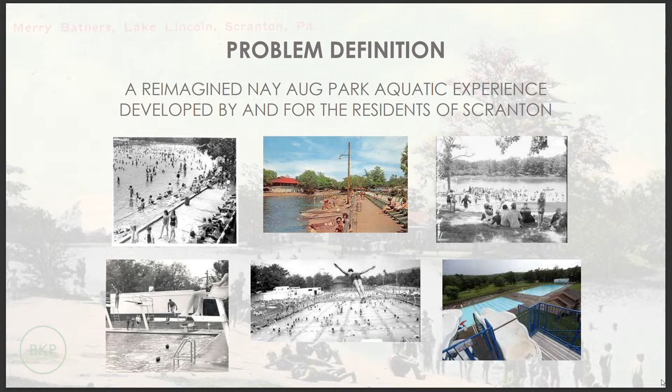As Eileen mentioned, we had multiple meetings - at least 5 meetings between the study committee and the public. We had one original meeting with the study committee, which included Eileen, Councilman Smurl, Scott, and a bunch of other folks from the city. They gave us some general marching orders about how to go forward, and we tried to keep those in mind as we went forward. We had a meeting on August 1st up at Nay Aug with about 30 people that attended.

Everybody was very excited that this was moving forward and something was going to happen. We had another meeting August 8th, and then another one on August 15th, and the thing that came across the most among all the people that participated in each of the meetings was that Nay Aug is and was a beloved facility. A lot of people had great memories of being there, and one of the key takeaways was that they hoped whatever we created, whatever happened from this process, enabled the next generations to have those same kinds of memories from their experiences at Nay Aug.

Let's see, what do we have? The biggest thing that we also did - sorry, I lost my train of thought - we had a community survey as well. We had 902 people participate in that community survey, which was a pretty good response for the couple of weeks it was up. 80% of the people that participated were residents of Scranton, and 90% of the people that participated wanted some kind of a new thing. So there's a groundswell of everybody wanting this.

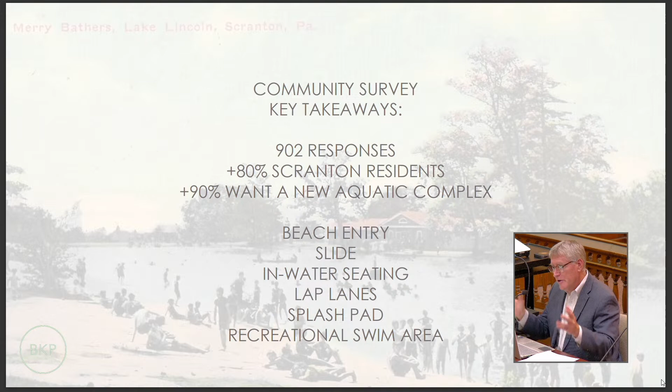The 6 key things that rose high on the survey were some sort of a beach entry, a slide, in-water seating, lap lanes, a splash pad, and making sure there was a place for recreational swim. You'll see these things reappear again in both of the options. They also helped us come away with some direction from the study committee at the second meeting about what to make sure we included, which are these items.

One of the things that came out of that was no diving board. At the second public meeting we went back and forth. A couple of folks said you have to have a diving board, and another couple said no diving board, they're awful. So it was really an interesting back and forth. Each of these meetings was like that with the public. Everybody had great opinions about what they wanted and didn't want. It was good, a lot of fun.

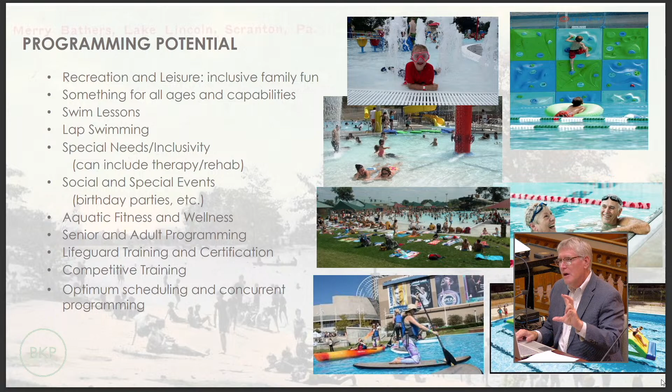But anyway, we got our marching orders at the second study committee meeting. One of the things that came away as well, and you'll see in both of these options we're showing you, is there's programming potential beyond just a body of water. Now we're not saying you have to do these things, but these are potential things that can happen there, in both of these options.

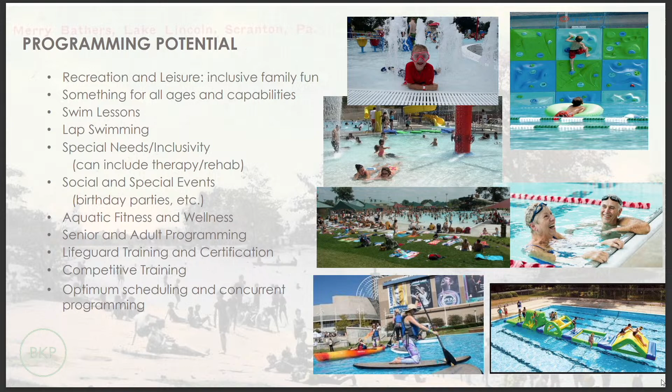You can do lessons, people can swim, we'll have special needs and inclusivity incorporated into what we do. One of the things we want to make sure is that you could start training your own lifeguards with the facility. There's also ideas about whether and how we can schedule things, but none of this is what we're asking tonight. We're just letting you know that lots of good things can happen in both of the options we present to you.

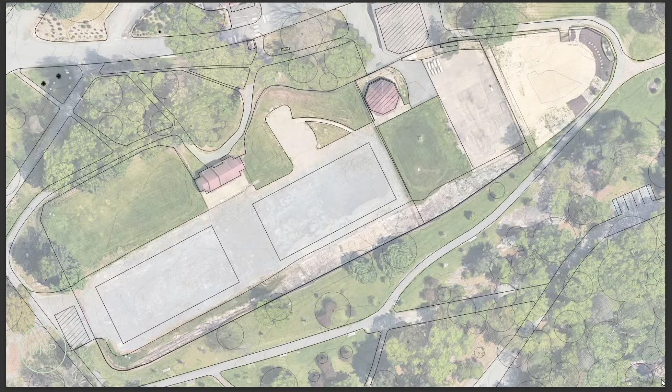So we did some analysis of the bathhouse. We took a look at the facility, and it's in good shape. It can remain. I think we want to renovate it, and we want to make it work a little different than what it is now. But I think one of the conclusions we took away is that we can renovate this bathhouse and make it work.

The other conclusion we took away—we did a big exercise with the study committee about how people would arrive here and how service would get in. The upshot of that was that the pump house where it was is really the best place for a new pump house in terms of ease of service. You can get trucks in there to bring the chemicals and the equipment and be able to move things in and out. So a couple of takeaways on that for this slide.

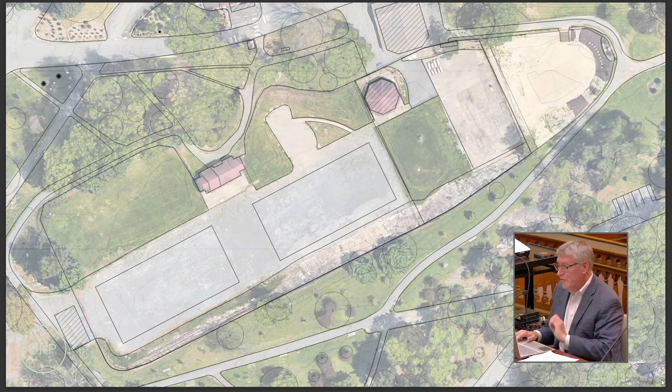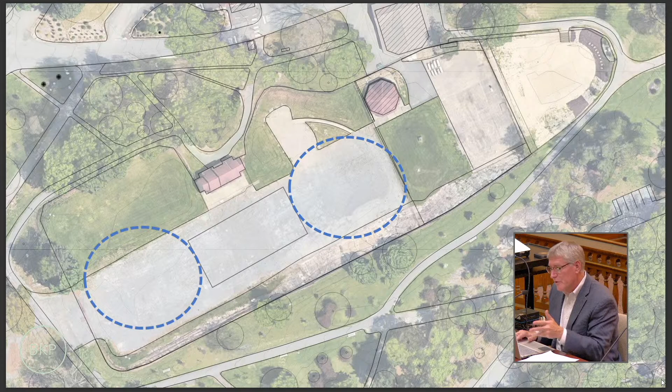But anyway, this is what you had. Obviously now what's on site is a big empty space. So how do we start thinking about what we do here? If we just put a body of water, some sort of experience right in the center off of the bathhouse, we kind of have two unused portions of the site that were a little awkward. So we were concerned about making space that you couldn't use in the future.

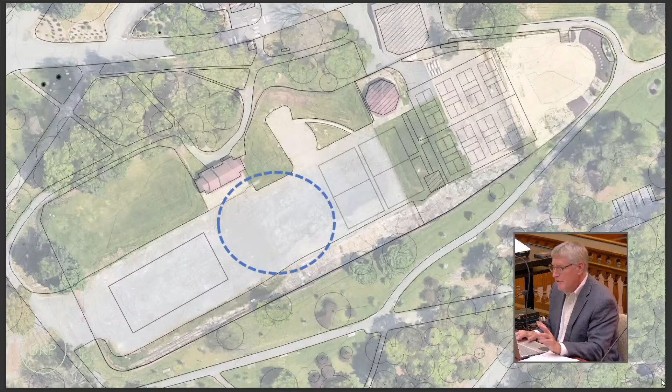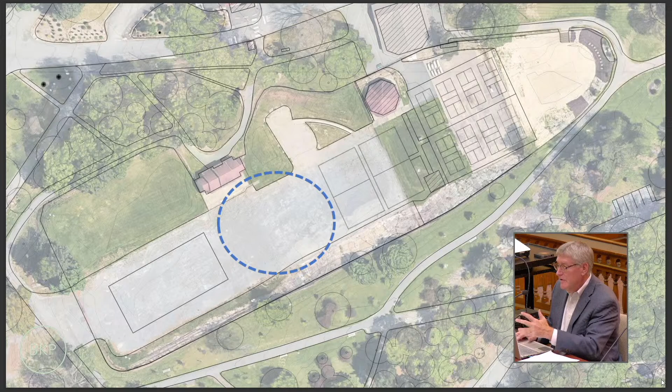So what we did is we took the proposed pickleball and multi-purpose court design and put it adjacent to what we were doing. And obviously that takes up one side, but we still had this other side that was a little underutilized. So we slid the pool options, the aquatic options, down to the lower left, making them more adjacent to the proposed new pump house. And then it leaves us another space in the middle that you could use in some way.

So being architects, we can't help ourselves. We took a look at what happens if we just flip the court layout. And it seems to be something that might work out a little better in terms of how you use all the available area in the space. This is just for consideration, it's not obviously part of what we've been charged with.

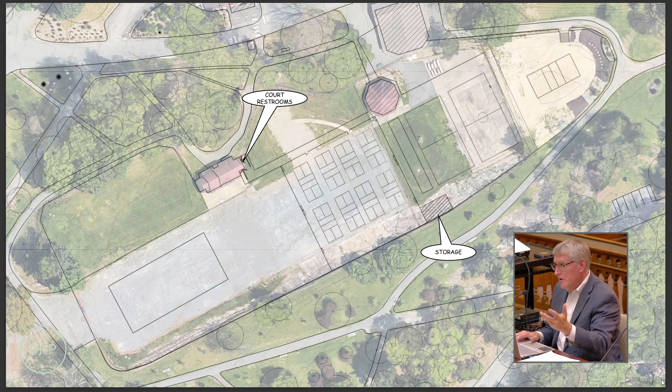But we like the idea of having a little bit more relationship between the storage building and the existing gazebo. And one of the things this exercise revealed to us is one of the wings of the bathhouse could really be used to provide two restrooms for folks that use the courts. There's room in that bathhouse to make separate, independent, inclusive bathrooms. Anybody could use them, and there's a little wing on that bathhouse.

So we're throwing that idea out for you to consider as we move forward, not to approve tonight, but as something to move forward—that we can use part of that bathhouse to have a public bathroom for folks that use the pickleball courts, if you'd like that.

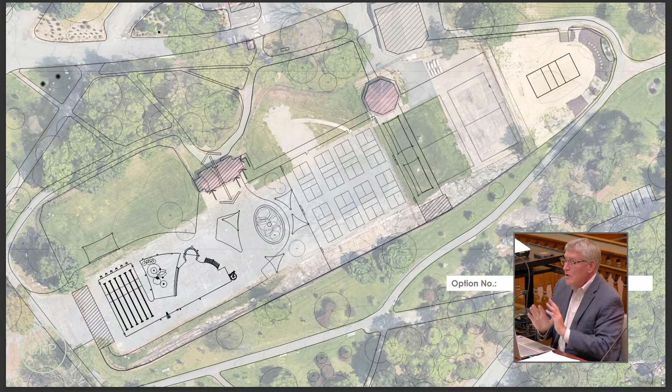So anyway, we've got 2 schemes to show you using all of those things that we put together in terms of how things laid out. Option number 1 is a single body of water. Everything's organized near where the equipment will be housed in the lower left. It has a spray ground, it has shade structures.

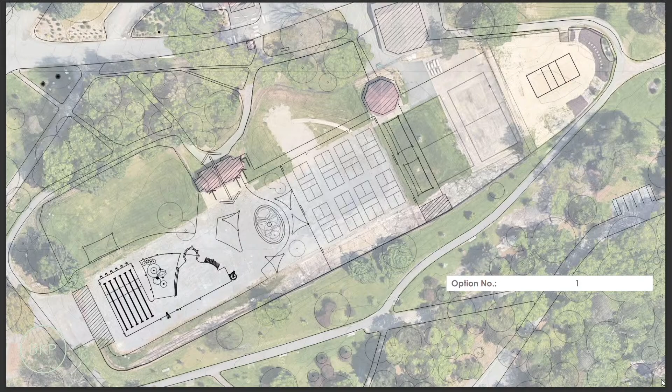The single body of water has a zero entry area with some more spray features. It's got a place for water aerobics, a place for lap swimming, and a small slide. There's a slide that doesn't require someone to be at the top of the slide, so it doesn't require more staff. Let me go to the next slide because it starts to point out all the features of what goes on here.

We've got our entry at the existing bathhouse, some shade structures, the splash pad, and a little lawn area that we've created. We have the slide, the aerobics, the swim lesson area, and the recreation area for when people aren't swimming laps.

The pool will go from the zero entry, and then the program/activity area will be 3.5 to 4 feet deep. And then the lap area will vary from 4 feet to 8 feet. That 8 feet is something we think is important because it gives you the ability to train your own lifeguards. To train a lifeguard, you have to have at least 8 feet of water.

Is the 4-foot area on the lower part because it connects over to this other section? I don't see separation between the lap pool and the... There's not, it's one big pool in this option. But you're saying in the lap pool, one area is deeper than the other? The very end where the starting blocks are, that would be the deep end. Those are things we can leave in or take out, but we're just showing you where they'd be.

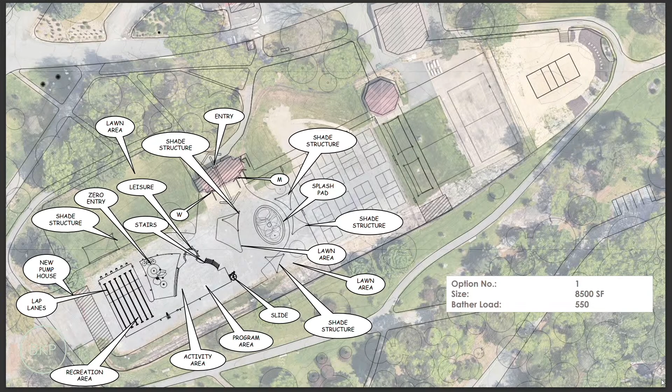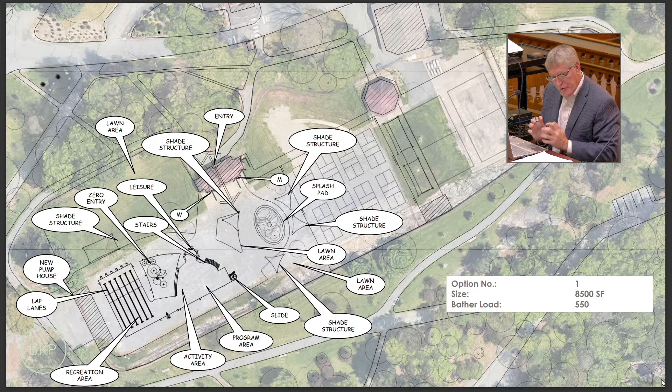One thing I forgot to mention is that the two schemes show almost the same size water, almost the same bather load, and they're almost equal in anticipated cost and operating costs. We wanted to do it that way so we weren't judging about the numbers, but about the experience that would be here. Both of these are able to support all that programming that we talked about.

In option number one, the pool area is about 8,500 square feet, and we have a bather load of about 550 people, that's your max amount at any one time. The splash pad is about 1,100 square feet by itself, off to the side.

For the 8,500 square feet and 550 people, when you put in the aquatics pieces cost, the pump house cost, the renovation of the bathhouse, and the number for site work - again these are back of the napkin numbers, based on reality but we can drill down and make them tighter as we design something - we're looking at about a $6.5 million cost for this scheme, and it would cost about $328,000 a year to operate.

Okay, second scheme - and I have a summary slide we can go through later. Option number two, we split the pools. One would be laps and recreation, the other would be zero entry, swim lessons, water aerobics, and activities. This one has a splash pad too.

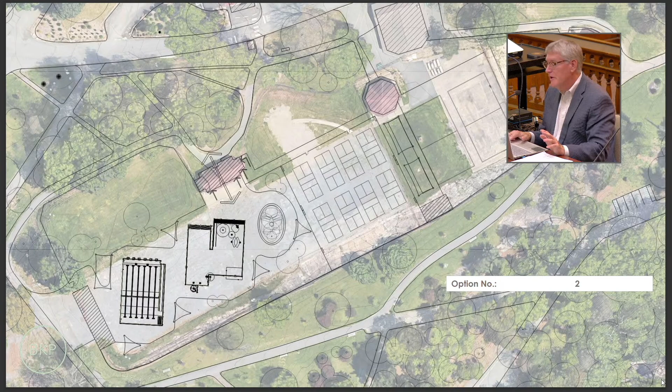Same thing, you'd come in through the existing bathhouse. The pump house would be on the lower left. You can see these features are mostly the same as the other pool featured. We're not compromising on the experience in either option - everything you can do in this one, you can do in option number one and vice versa, pretty much.

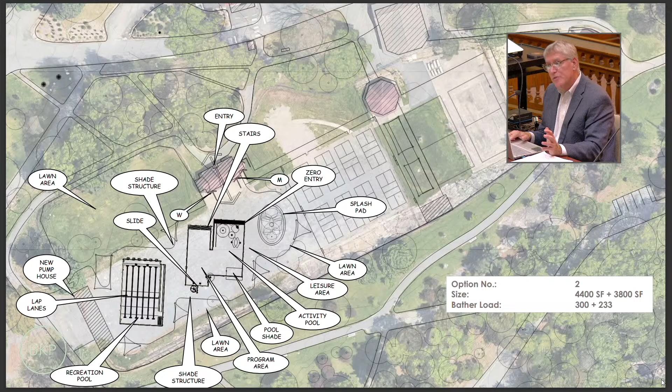In this option, the activity pool is 4,400 square feet, and the lap pool is 3,800 square feet. We've got a combined bather load of 533, so again they're very similar. And in this option, we have about a $6.3 million cost.

The same thing would happen in the activity zero entry pool. We'd go from 0 to 3.5 to 4 feet of water, then from 4 feet to 8 feet of water in the lap pool, and that 8 feet is important for lifeguard training. This one would cost about $318,000 to operate, because you don't have to have both open at the same time, which saves some staff time depending on scheduling.

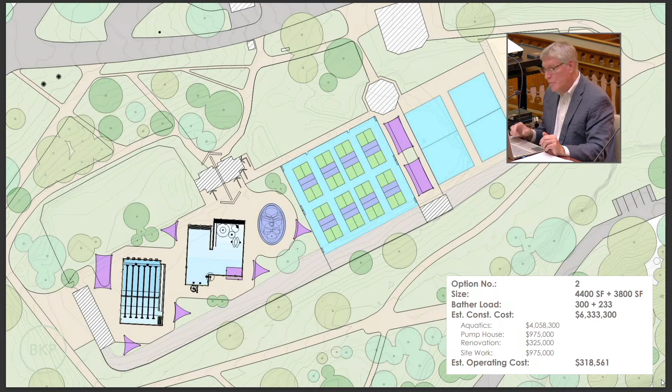One thing we wanted to address is the advantage of one pool versus two pools. It's easier to keep the smaller pool warmer because of the sun and it's not as deep. You can close one pool when it's not in use, so operating costs would be smaller.

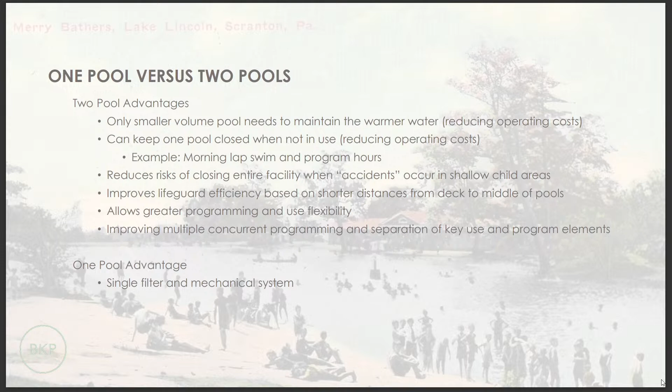A key advantage: if there's an accident, you can still keep a body of water open, so you don't have to clear everybody out of the pool for 4 hours. There's a bit more efficiency on lifeguarding, and having both pools gives you maximum ability to program a lot of things in this area.

We could do two things at once in this setup. With just one pool, you only need one set of mechanical equipment, which is an advantage for the single pool option.

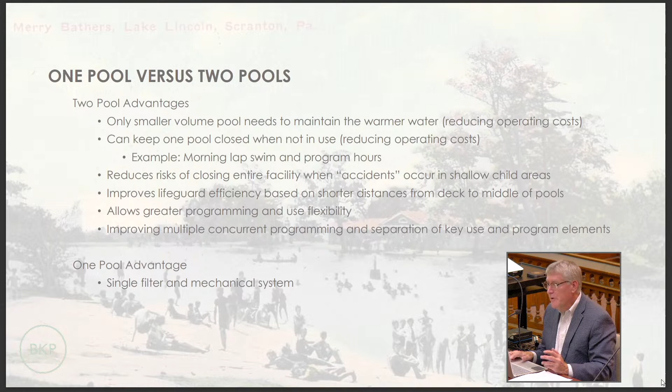Comparatively, side by side, the numbers are pretty similar across the board. It's really about how you want to approach the project. With option 1, you pretty much build everything and then decide yes or no on the splash pad. With option 2, you could go one pool, then two pools, then splash pad, or any combination—there's the ability to phase it over time. Not that that's what we're asking you to do, but it's there if you want to consider it.

For next steps, as we develop whichever scheme you choose tonight, we have to work on building the city's capacity—whether through third parties, outsourcing, or in-house—to run the programs we think can happen in these bodies of water. There are all kinds of other things further down the road that we're thinking about, not necessarily for consideration tonight, but we want you to know we're planning for them. That's everything I have.

I can go back and forth, toggle whatever you want to see, or talk over or ask about anything in detail.

With the lap pool, do you know the dimensions? It's 25 yards in the lap direction—not a 50-yarder, not Olympic. It's competition style length with 6 lanes. Both pools have 6 lanes, and I think each lane is 7 feet wide.

Option 1 has zero entry, which makes it 100% accessible. And since it's only one body of water, we didn't need to add a ramp for the lap area. So in option 2, both pools are still accessible? Correct, yes. Okay, thank you.

So in terms of moving forward from here, what would be the next step? I don't know if anyone else has any questions. We have the two options in front of us now—wasn't sure if anybody else had questions beyond that.

As far as the two options, we took both up to the Recreation Authority meeting last month. They chose the second option for the two pools—there's a lot more advantage to it, and it was cheaper to construct and cheaper to maintain. They unanimously voted to go with that option, which I believe was number 4 at the time.

One of the things is we had about 7 options and narrowed it down to these 2. So it's the same drawing, just a different number? Correct, yep. Okay, so it's option 2.

So are you asking council tonight to tell you what option they'd like? Yes. That's the takeaway I'd like tonight—that you tell me which direction to go, and I can start making all these things more concrete.

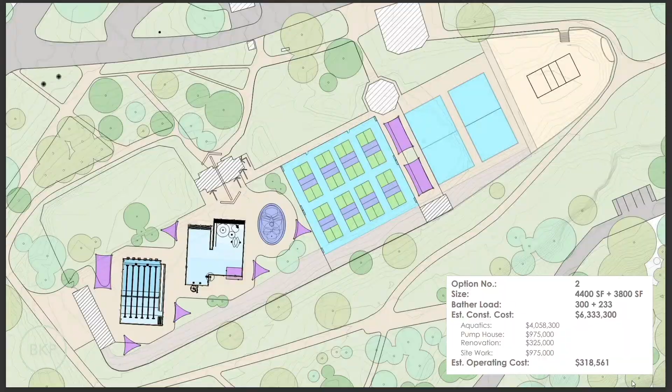Great, thank you. So while we can't vote on this tonight, based on your presentation and looking at the numbers, designs, and pros and cons, I believe where I sit is with the two different pools for two reasons. One, if one is down, we could still maintain the other and keep it open. And the other reason is it's a little more cost effective. That's kind of where my head is at, but I don't know where others stand. Well, as I said, we can't vote on this tonight.